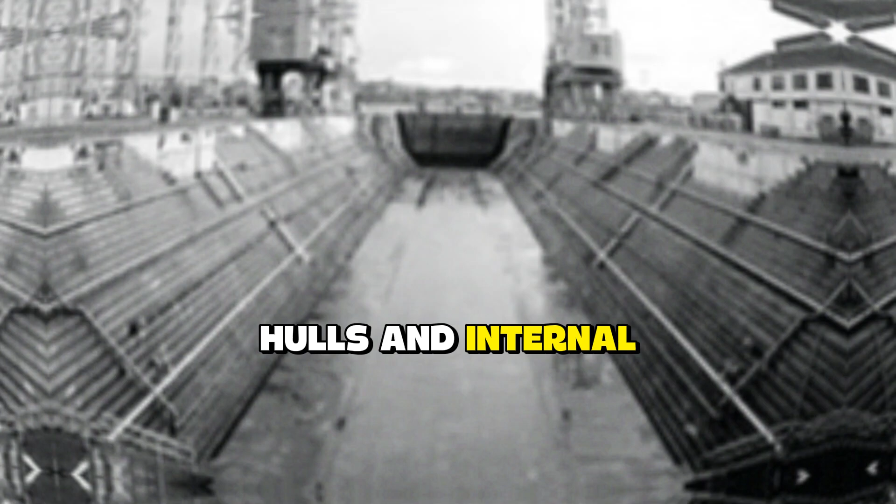He earned $11 per day, working the day shift from 7 in the morning until 4 in the afternoon. His job was welding, primarily on submarine hulls and internal structures. He was good at his work, fast and precise, but increasingly frustrated by what he saw as wasteful inefficiency. The problem was everywhere he looked.

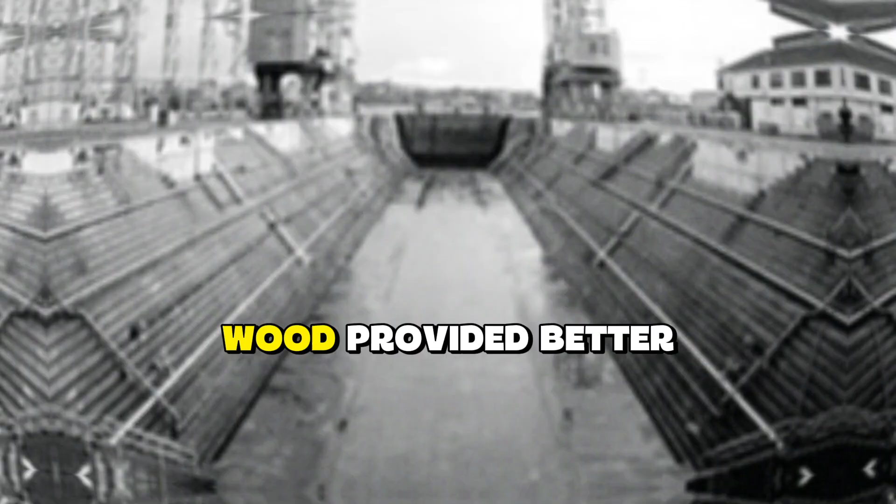Wooden deck planking installation on submarines, destroyers and aircraft carriers. The Navy specified wooden decks for several reasons. Wood provided better traction than steel in wet conditions. Wood was quieter for crew movement. Wood provided some insulation against the cold steel beneath. And in the event of fire, wooden decks could be more easily repaired or replaced than welded steel plates. But the installation method was archaic, labor-intensive, and painfully slow.

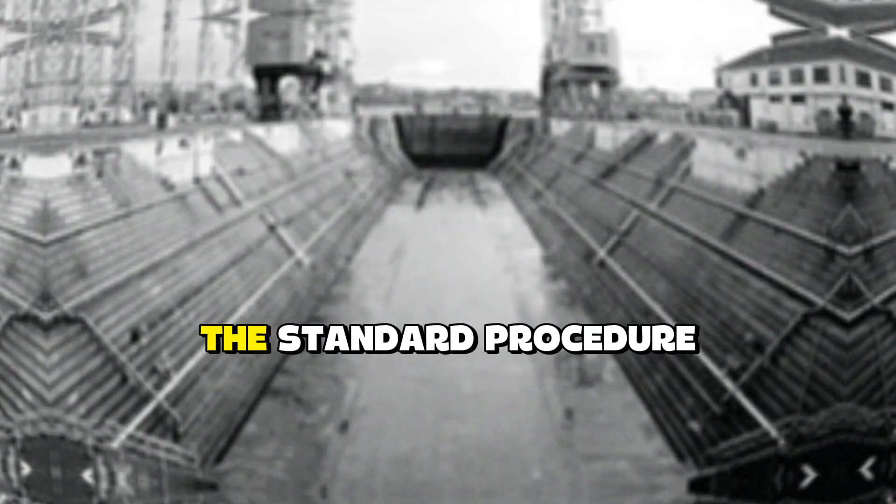The standard procedure, unchanged since the First World War, proceeded in a series of complicated steps. First, workers would drill holes through the wooden planks at precisely measured intervals. These holes would be countersunk to allow the heads of the attachment bolts to sit flush with the deck surface. Next, workers would position the planks on the steel deck framework. Then came the nightmare: workers had to construct extensive scaffolding beneath the deck inside the submarine or ship compartments. Multiple levels of platforms were required to give workers access to the underside of the steel deck framework.

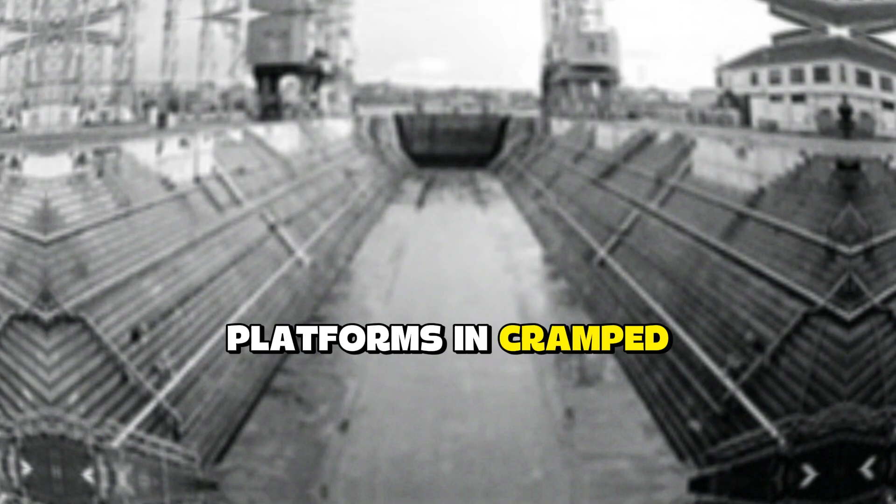Once the scaffolding was in place, workers above and below would coordinate to insert long threaded bolts down through the wooden planks and through corresponding holes in the steel framework. Workers below, standing on scaffolding platforms in cramped dark spaces, would thread nuts onto the protruding bolt ends. They would tighten these nuts with wrenches, pulling the wooden planks firmly against the steel framework above. Finally, workers topside would fill the counterholes with wooden plugs, creating a smooth deck surface. The entire process was repeated for every section of decking. On a submarine, there might be several hundred square feet of wooden decking, requiring thousands of individual attachment points.

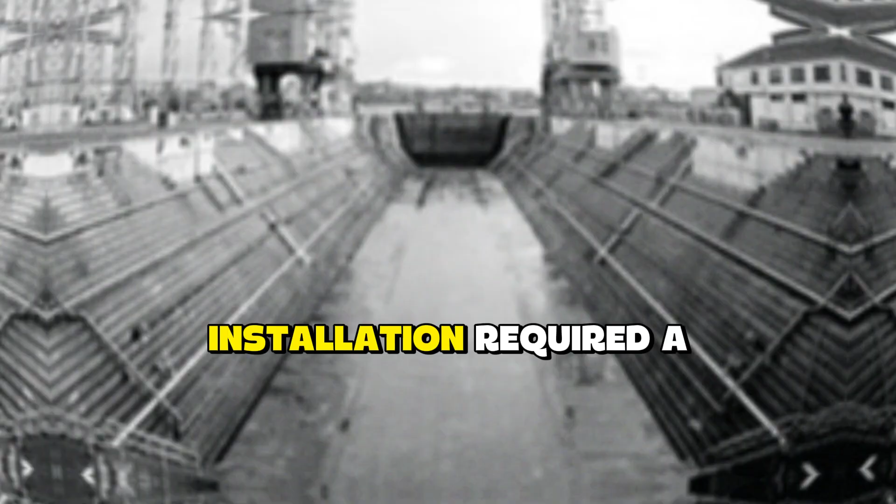On an aircraft carrier, the wooden flight deck covered tens of thousands of square feet. The labor requirements were staggering. A typical submarine deck installation required a crew of 12 to 16 men, working for 5 to 7 days. The scaffolding alone took 2 full days to construct and another day to dismantle.

The actual bolt installation consumed the remaining time. Ted Nelson had performed this work dozens of times. He had spent countless hours standing on scaffolding platforms, threading nuts onto bolts in cramped submarine compartments barely 4 feet high. His back ached from the constant bending. His knuckles were scarred from slipped wrenches. His patience was exhausted, but more than personal discomfort drove his frustration.

He could see the bigger picture. War was coming. Everyone at Mare Island knew it. The yard was already behind schedule on submarine construction. The Navy needed boats in the water, not sitting in dry dock waiting for deck installation. Every day of delay was a day closer to a conflict. America was not ready to fight, and Nelson knew there was a better way.

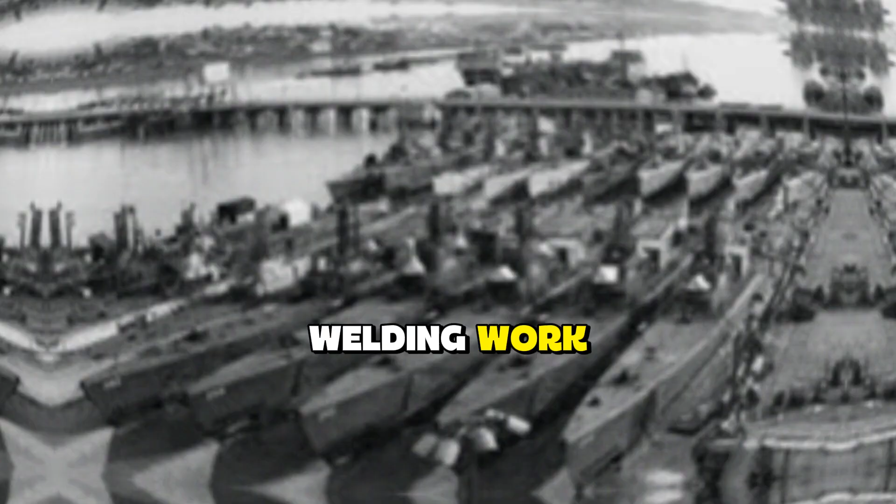He had been thinking about the problem for months, turning it over in his mind during the long hours of routine welding work. The solution seemed obvious to him. Instead of bolting from above and threading nuts from below, why not weld attachment studs directly to the steel framework? Weld from one side only and from above. No scaffolding required, no nuts and bolts, no workers cramped in compartments below. Just fast, strong, permanent welds.

The concept was simple. A threaded stud, essentially a headless bolt, could be welded to the steel deck framework in a fraction of a second. The wooden planks would have threaded inserts or specialized nuts to attach to these studs. The entire operation could be performed from the topside only. No scaffolding, no below-deck work, no coordination between crews above and below.

Nelson had seen stud welding before in a limited form. The technology existed for horizontal flat plate welding. A small pile of flux powder would be placed on a flat steel surface. A stud would be positioned in the flux. An electrical arc would fuse the stud to the steel. But this method only worked on horizontal flat surfaces. The flux powder would simply fall off vertical or overhead surfaces.

And naval construction required welding in all positions, vertical, horizontal, overhead, at all angles. This was the problem that had puzzled welding engineers for 20 years: how to make stud welding work on non-horizontal surfaces. Nelson thought he had the answer. It was so simple he almost laughed when the solution came to him.

Instead of loose flux powder, encase the flux in a small ceramic cap. Attach the cap to the end of the stud. The flux stays in place regardless of position. He sketched his idea in his notebook: a handheld welding gun, a spring-loaded mechanism to press the stud against the steel surface, an electrical trigger to create the welding arc, a disposable ceramic flux cap on the end of each stud. The whole operation would take less than 1 second per stud. One worker could install dozens of studs in the time it currently took to install a single bolted connection.

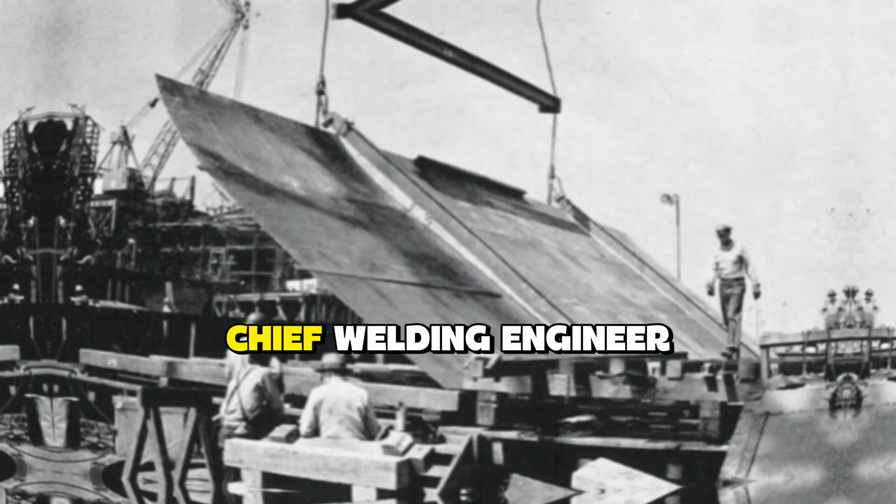Nelson tried again, approaching the shipyard's chief welding engineer, a civilian contractor named Hartwell. He explained the time savings, the labor reduction, the elimination of scaffolding costs. Hartwell was more polite than Morrison, but equally dismissive. "Son, people a lot smarter than you and me have been trying to solve this problem for 2 decades. If it was that easy, someone would have done it already. Besides, the Navy has specifications. We cannot just change procedures because a welder has an idea."

"You need approval from the Bureau of Ships in Washington. You need engineering studies. You need prototype testing. That takes years." "We do not have years," Nelson protested. "We need submarines now." Hartwell shrugged. "That is not my problem, Mr. Nelson. My problem is building boats according to approved specifications. Your problem is doing the welding work you are paid to do."

Nelson left the meeting angry and disillusioned. He had offered them a solution that could save thousands of hours per submarine. They had dismissed him without serious consideration, not because his idea was flawed, not because it would not work, but because he was just a welder.

Because changing procedures required paperwork and approvals. Innovation was less important than following established protocols.

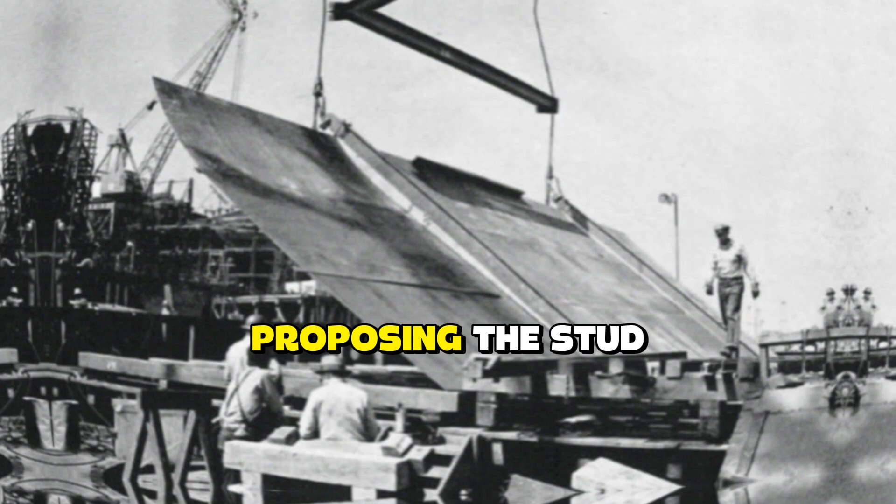He made one more attempt, writing a formal letter to the shipyard commander, Captain Thomas Withers. The letter was carefully composed, explaining the current inefficiency, proposing the stud welding solution, and estimating time and cost savings. He submitted it through proper channels, following the established procedure for worker suggestions.

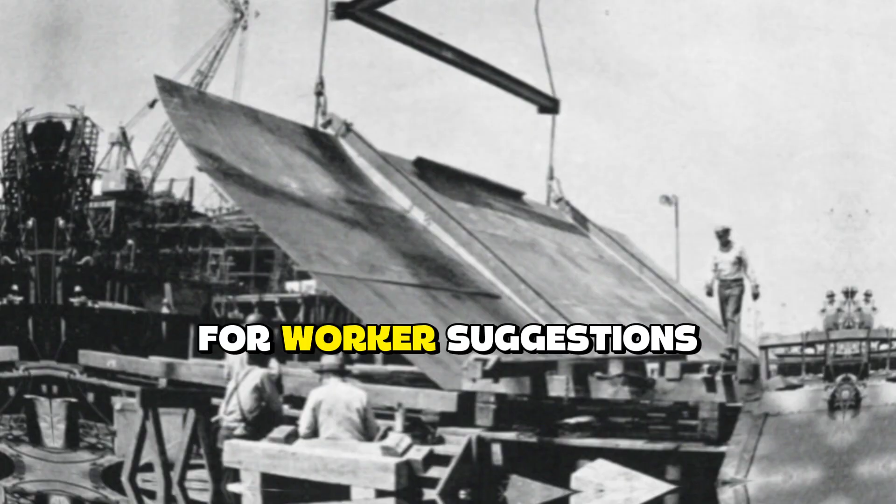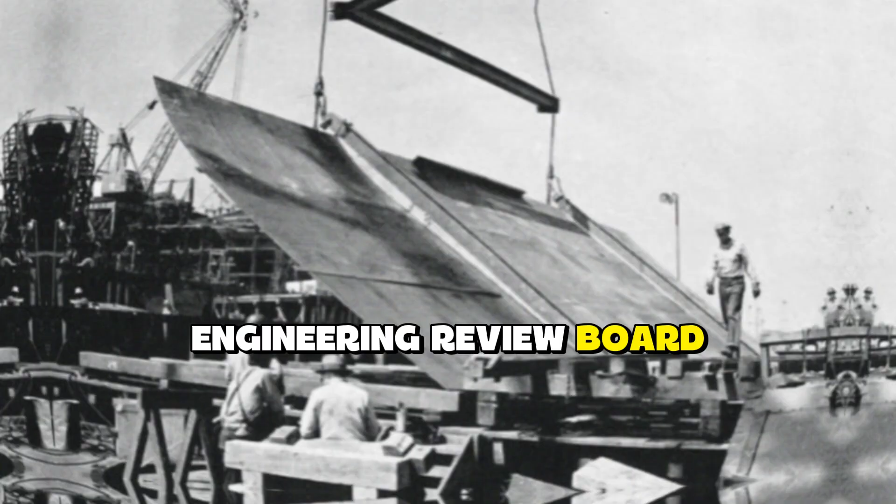Three weeks later, he received a reply: a form letter thanking him for his interest in improving shipyard efficiency, a polite explanation that all technical proposals were evaluated by the Bureau of Ships Engineering Review Board, a notation that his suggestion had been forwarded for consideration, and a realistic assessment that the review process typically took 18 to 24 months. He would be notified if his proposal was approved for further study.

18 to 24 months. By then, the war might already be over or lost. Nelson crumpled the letter and threw it in the waste bin. That evening, he made a decision that would change his life and alter the course of naval history: if the Navy would not listen, he would build it himself.

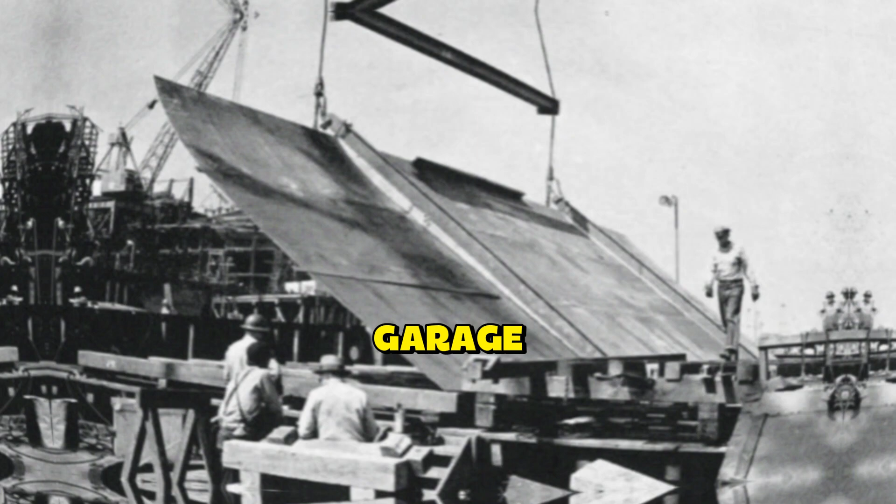He would prove his concept worked. Then they would have to pay attention. He cleared a space in the garage behind his small cottage in Vallejo. His wife, Emma, watched with concern as he began collecting scrap steel and welding equipment. "Ted, you are going to get yourself fired," she warned.

"You are supposed to be working on Navy projects, not your own inventions." "This will help the Navy," he replied. "They just do not know it yet."

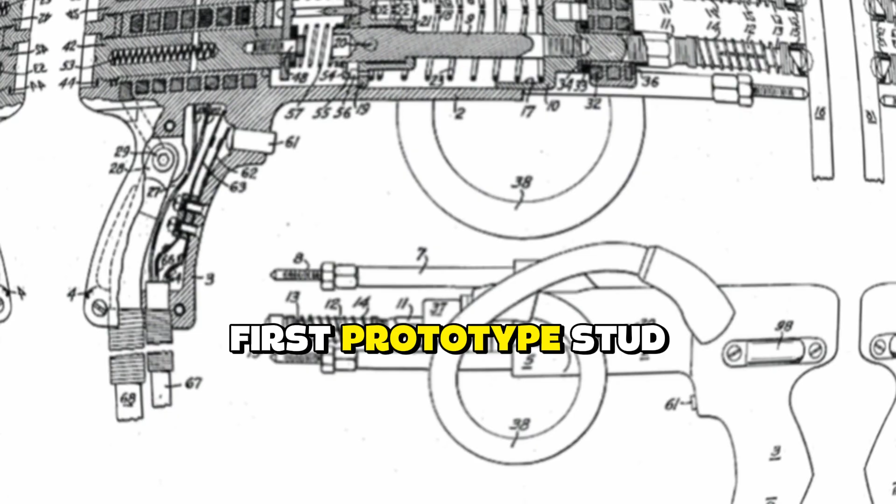Over the following weeks, working evenings and weekends, Nelson constructed his first prototype stud welding gun. The design was crude but functional: a pistol grip handle, a spring-loaded plunger to hold and press the stud, an electrical trigger connected to a welding power supply, and a quick-release mechanism to load new studs.

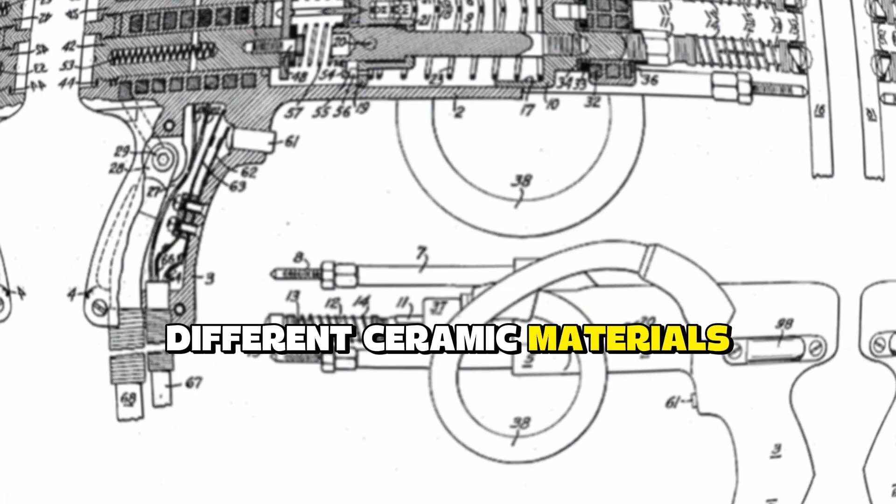The most critical innovation was the flux cap. He experimented with different ceramic materials, different flux compositions, and different cap designs. After dozens of tests, he developed a cap that held the flux securely, allowed proper arc initiation, and could be manufactured cheaply. By May 1941, he had a working prototype.

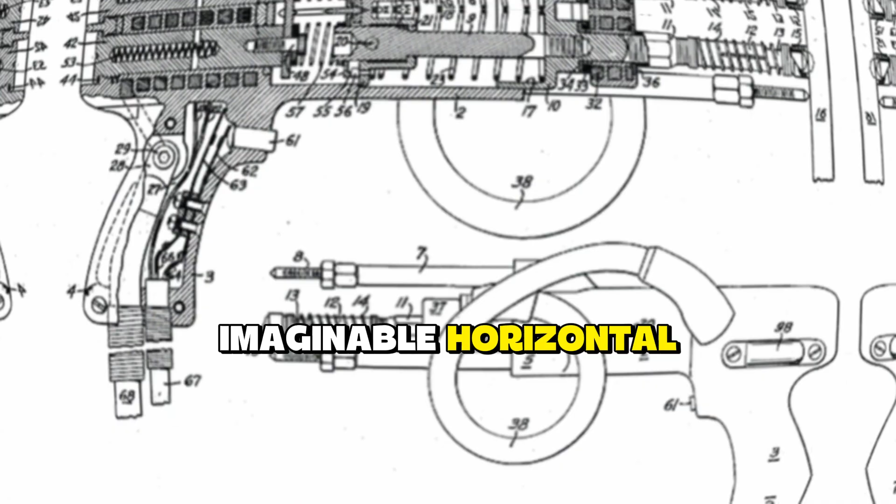He tested it on scrap steel in every position imaginable: horizontal, vertical, overhead, at angles. The gun worked flawlessly. A stud could be welded in less than one second. The weld strength exceeded that of traditional through bolts, and most importantly, it required no below-surface access.

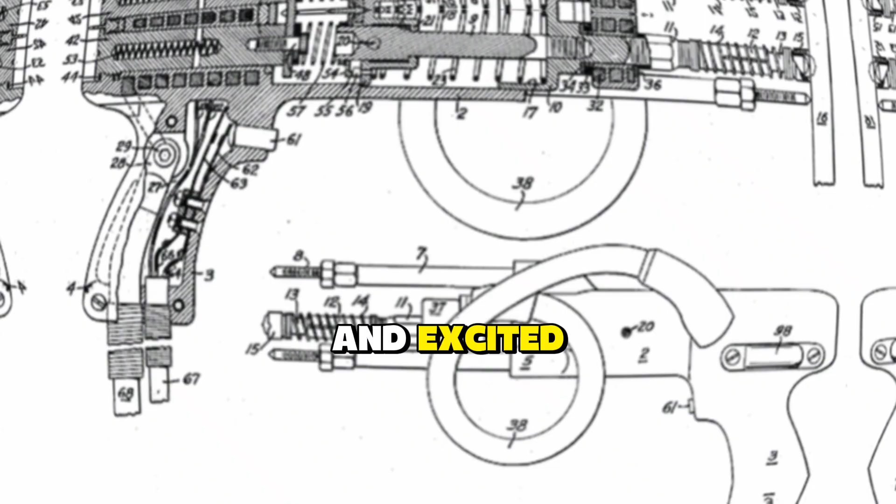He brought the prototype to work, demonstrating it to several fellow welders during lunch break. They were impressed and excited. "This is going to save us so much time," one remarked. "You need to show this to Morrison," another suggested. Nelson shook his head. "I already showed Morrison. He was not interested."

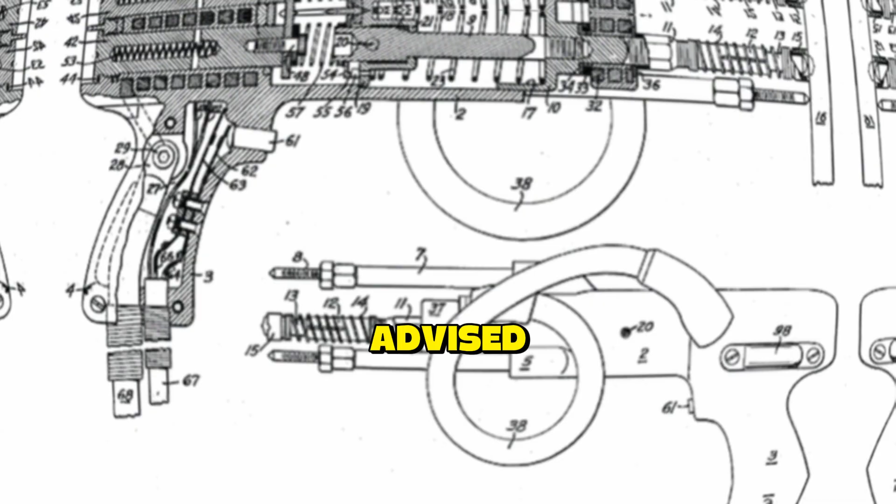"Then quit and start your own company," a third welder advised. "Sell your gun to shipyards across the country. You will make a fortune." The idea had not occurred to Nelson.

He was a welder, not a businessman. He had no capital, no manufacturing facility, no business experience. But the more he thought about it, the more sense it made. If the Navy would not use his invention, maybe private shipyards would.

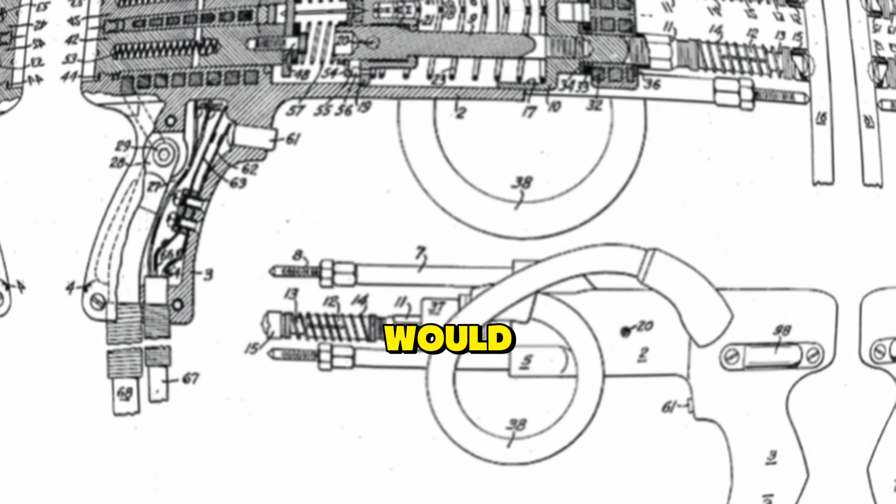The Kaiser shipyards in Richmond were hiring. The Bethlehem Steel Shipyard in San Francisco was expanding. There were shipyards up and down the West Coast, all facing the same labor shortages and production pressures. On June 20th, 1941, Ted Nelson submitted his resignation to Mare Island Naval Shipyard.

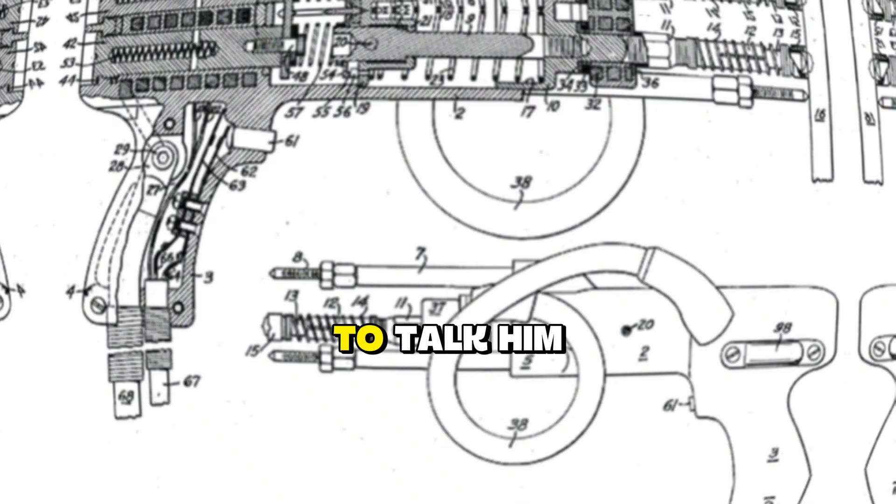His supervisor tried to talk him out of it. "Nelson, you are a good welder. Do not throw away a steady job for some crazy invention." But Nelson's mind was made up.

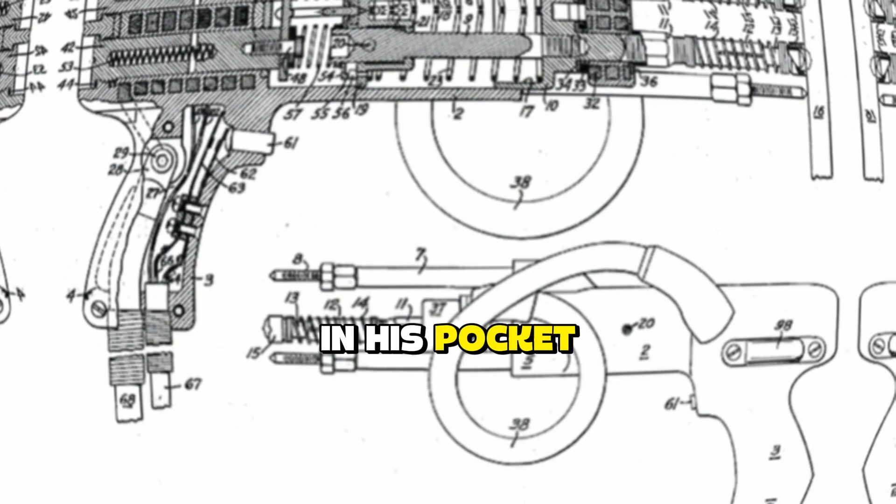"I'm going to build welding guns," he told Morrison. "And when the Navy comes back asking to buy them, I hope you remember this conversation." He left Mare Island with $11 in his pocket, a garage full of tools, and a conviction that his invention would succeed. He incorporated the Nelson Specialty Welding Equipment Corporation on July 1st, 1941.

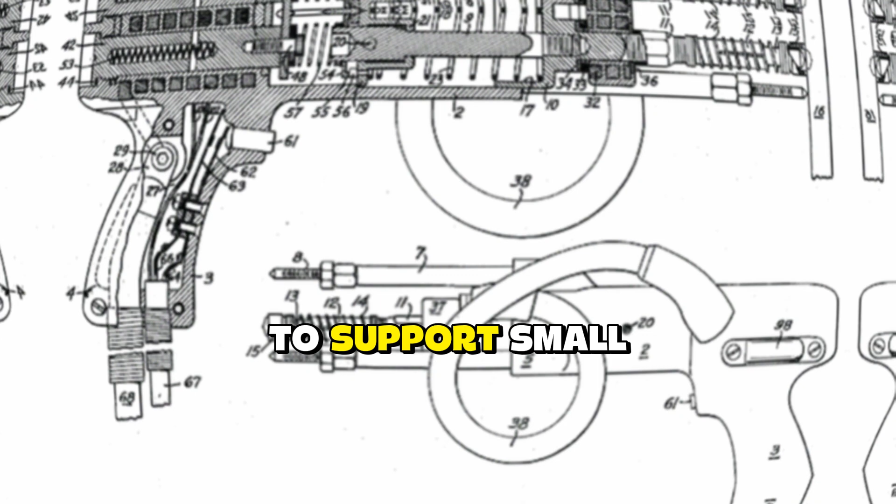He borrowed $95,000 from the Reconstruction Finance Corporation, a government lending agency established during the Depression to support small businesses. With that capital, he rented a small workshop in Vallejo and began manufacturing stud welding guns.

The first months were difficult. He had no customers, no reputation, no distribution network. He made sales calls to local machine shops and small fabrication companies, demonstrating his gun and explaining the time savings. Most were skeptical. A few were interested enough to try a demonstration unit. Slowly, very slowly, orders began to come in.

By September 1941, he had sold 18 welding guns and several thousand flux-capped studs. Then on December 7, 1941, everything changed. Pearl Harbor. The Japanese attack destroyed or damaged 8 battleships, 3 cruisers, 3 destroyers, and 188 aircraft. 2,403 Americans died. The United States was at war.

Suddenly, shipbuilding was not just important. It was a matter of national survival. Within days of Pearl Harbor, the shipbuilding industry exploded into frantic activity. The Kaiser shipyards began building Liberty ships at an unprecedented pace. Mare Island Naval Shipyard received emergency orders for submarine construction. Bethlehem Steel and other private yards started working triple shifts, and every single one of these facilities faced the same problem: how to build ships fast enough. The traditional methods were too slow, too labor-intensive, too wasteful of precious time.

Ted Nelson's phone began ringing. Shipyard purchasing agents who had dismissed his invention weeks earlier now wanted to place large orders. The Kaiser shipyards ordered 50 welding guns and 10,000 studs. Bethlehem Steel ordered 40 guns. Even Mare Island Naval Shipyard, where he had been rebuffed just months earlier, placed an order for 60 guns and 20,000 studs. Morrison, his former supervisor, handled the purchase requisition. There was no apology, no acknowledgement that Nelson had been right, just an official order and a request for prompt delivery.

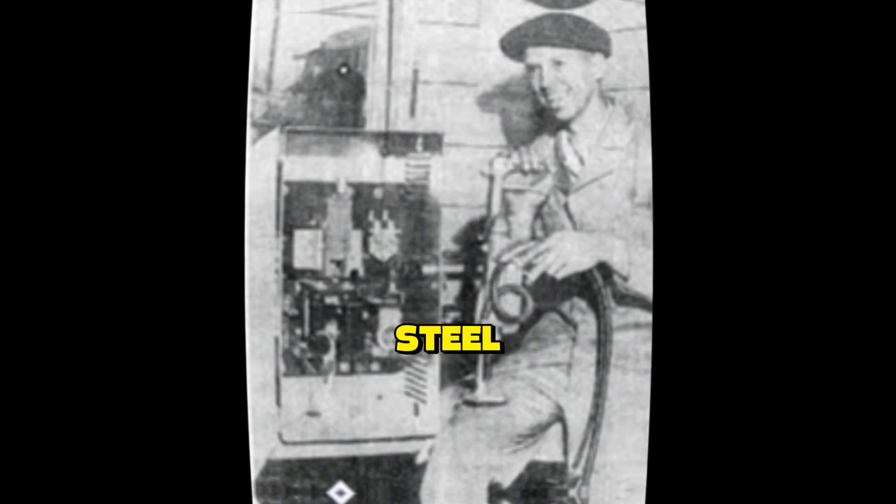At Mare Island Naval Shipyard, submarine construction accelerated dramatically. The yard completed 17 submarines between 1941 and 1945, with an average construction time that steadily decreased as new techniques were implemented. Stud welding was not the only innovation, but it was a critical piece of the efficiency puzzle. By mid-1942, stud welding was being used not just for deck attachment, but for dozens of other applications: pipe hangers, cable supports, equipment mounts, bulkhead attachments. Any situation where a fastener needed to be attached to a steel structure, stud welding provided a faster solution.

The Navy Bureau of Ships, which had initially ignored Nelson's proposal, now studied his process intensively. Engineering teams analyzed weld strength, durability, and failure modes. The results confirmed what Nelson had known all along. His welds were not just faster than traditional methods. They were actually superior in strength and reliability.

On November 19, 1942, just 17 months after leaving his job, Ted Nelson received a formal visit from a delegation of Navy officers. They came to his San Leandro plant unannounced, a group of 5 men in dress uniforms. Captain Harrison, representing the Bureau of Ships, did the talking.

"Mr. Nelson, we are here to inform you that the Navy has completed evaluation of your stud welding process. We have determined that your invention has saved the United States Navy an estimated 5 million man-hours in submarine and surface ship construction over the past 10 months. That number is expected to increase substantially as more shipyards adopt your technology." He paused, then continued. "On behalf of the Secretary of the Navy and the United States government, I am authorized to present you with a citation for exceptional contribution to the war effort."

Nelson was stunned. They had rejected his idea. They had ignored his proposals. They had forced him to quit his job and risk everything to prove his concept, and now they were giving him a citation. Captain Harrison must have seen the conflict on Nelson's face.

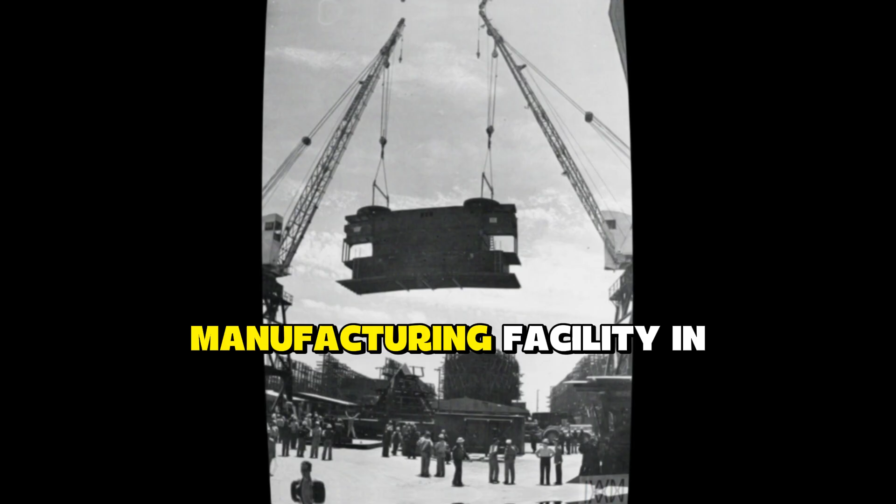The war continued. Production demands increased. Nelson's company expanded again, opening a second manufacturing facility in Camden, New Jersey. In March 1943, this East Coast plant supplied shipyards in New York, Philadelphia, Norfolk, and Charleston. By mid-1943, Nelson Specialty Welding Equipment Corporation employed over 400 workers and generated annual revenue of approximately $4 million.

Ted Nelson still spent 16 hours a day in the factory, still dressed in shop workers' tan pants and shirts, and still drew a modest salary of $1,000 per month. All profits were reinvested in expansion, equipment, and loan repayment. But his impact on the war effort was incalculable.

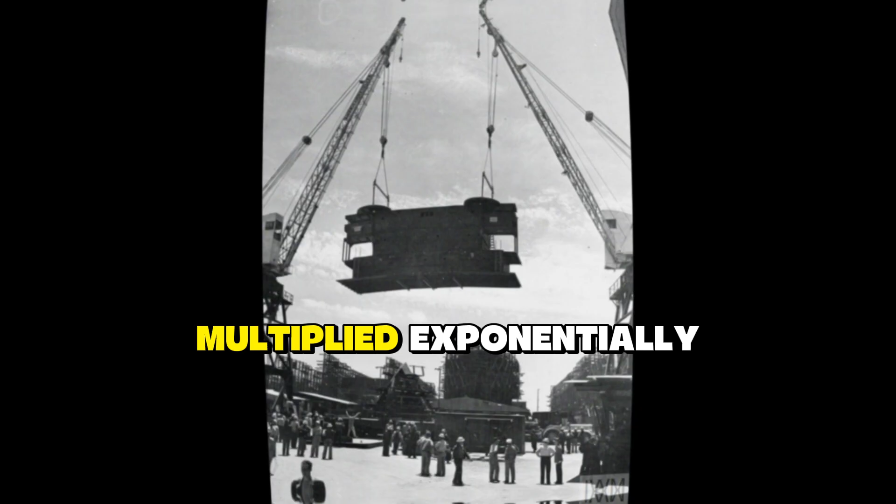The Navy's estimate of 5 million man-hours saved by late 1942 was just the beginning. As the war progressed and stud welding became standard practice across all naval construction, the time savings multiplied exponentially. By 1943, stud welding was being used not just on submarines but on aircraft carriers, battleships, cruisers, destroyers, and hundreds of smaller vessels. The Essex-class aircraft carriers built by Newport News Shipbuilding and other yards used Nelson stud welding extensively for flight deck attachment and interior fittings.

Each carrier required approximately 20,000 studs. The Navy built 24 Essex-class carriers during the war. The Iowa-class battleships used stud welding for deck planking, equipment mounts, and armor attachment. The Baltimore-class heavy cruisers incorporated the technology throughout. Destroyer escorts, landing ships, patrol boats, every type of naval vessel benefited from faster, stronger attachment methods.

But the most dramatic impact was in submarine construction. Mare Island Naval Shipyard, where Nelson had worked and where his idea had been rejected, became one of the most efficient submarine builders in the world. The yard built 17 submarines during the war with steadily improving construction times. Portsmouth Naval Shipyard in New Hampshire became the champion submarine builder, completing 79 submarines between July 1940 and July 1945.

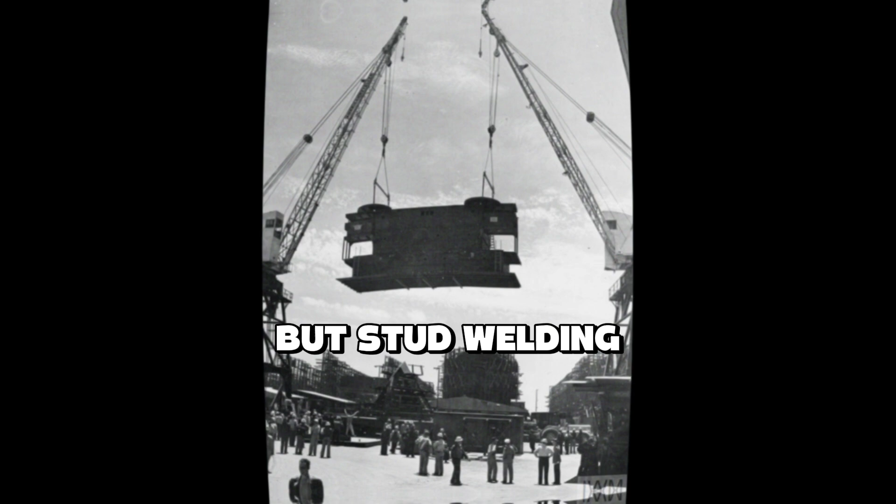Portsmouth's success was built on multiple innovations, but stud welding was a critical enabling technology. The yard adopted Nelson's system extensively, using it not just for decking but throughout the boat's interior. The result was visible in construction statistics.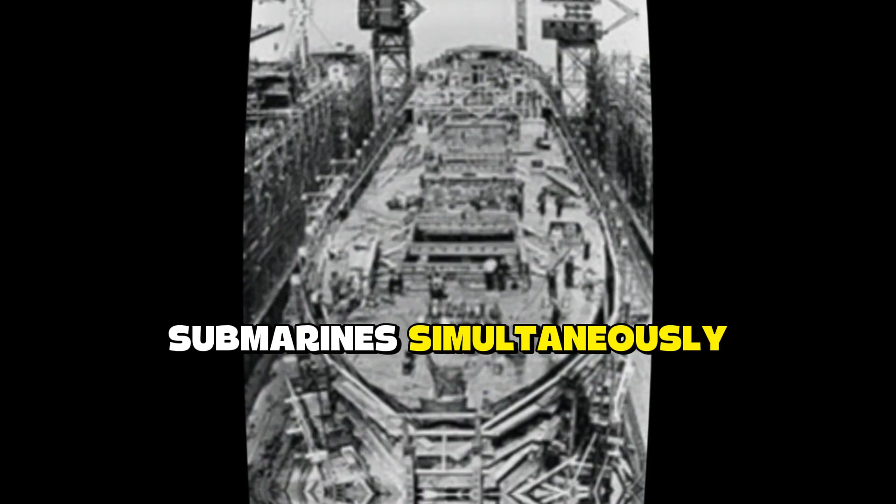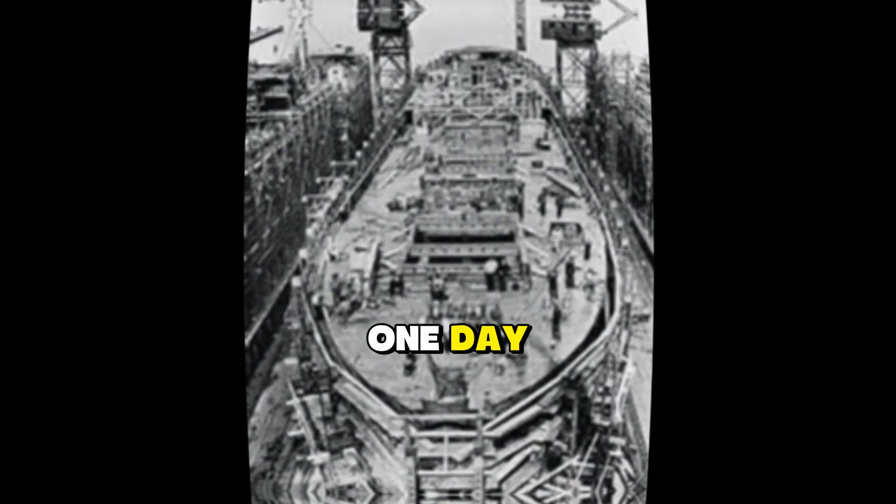Portsmouth launched 3 submarines simultaneously on January 27, 1944, the Redfish, Ronquil, and Razorback. A 4th submarine, Scabbardfish, launched the same day, 4 submarines in one day. No shipyard before or since has matched that achievement. At the peak of production, Portsmouth completed 32 submarines in 1944. This was approximately 1 submarine every 11 days.

The Balao-class submarines, which made up the bulk of wartime production, averaged 12 months from keel laying to commissioning at Portsmouth, several months faster than other yards building the same class. Electric Boat Company in Groton, Connecticut, built 74 submarines during the war. Manitowoc Shipbuilding in Wisconsin, despite being on the Great Lakes hundreds of miles from the ocean, built 28 submarines that were floated down the Mississippi River to the Gulf of Mexico. Across all yards, the United States built 203 submarines during World War II.

Each submarine required thousands of stud-welded attachments. Each stud saved minutes of labor time. Multiply those minutes by thousands of studs per submarine, by hundreds of submarines, and the time savings reached staggering proportions. But submarines were only part of the story. The real volume was in surface ships and merchant vessels.

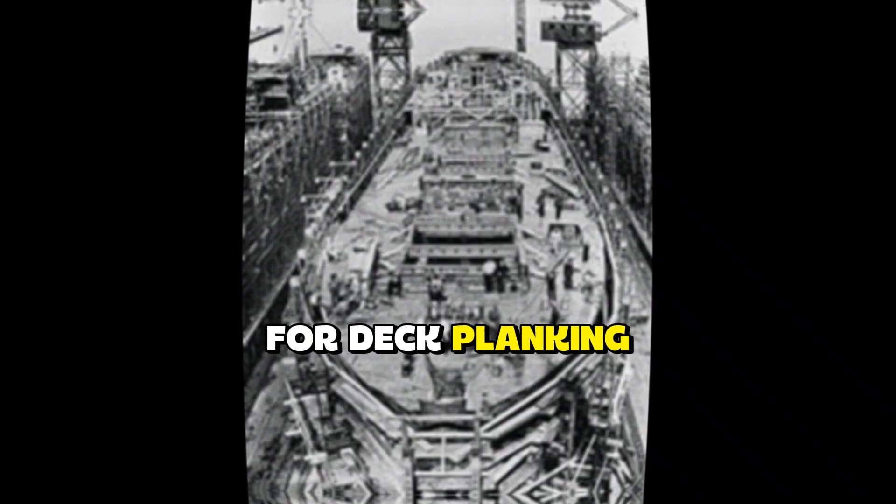The Liberty Ship program, managed by the Maritime Commission and built primarily at Kaiser shipyards, produced 2,710 cargo ships during the war. Each Liberty ship required approximately 5,000 to 8,000 stud-welded attachments for deck planking, cargo handling equipment, defensive gun mounts, and ship fittings. The Victory ships, a faster and more advanced design, were built to similar standards.

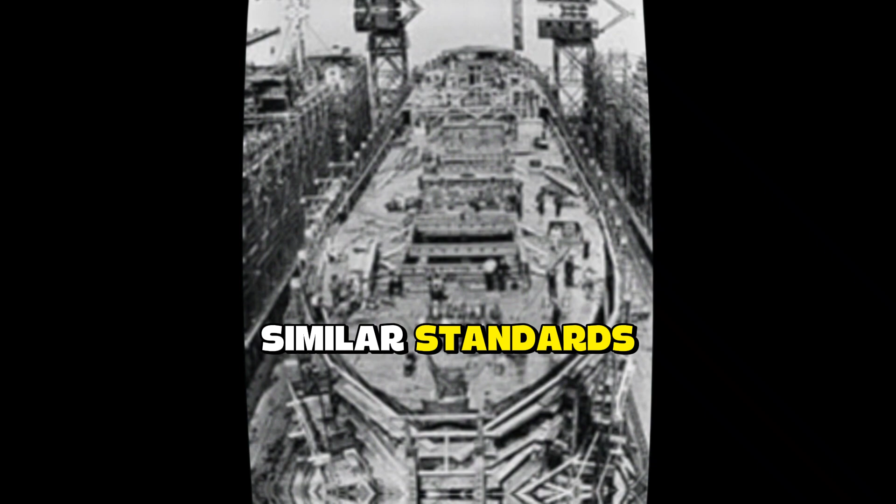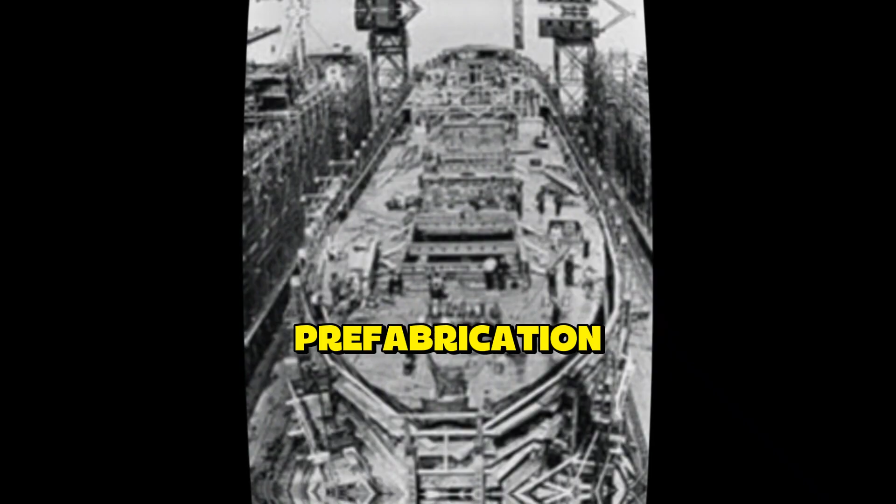The scale of production was unprecedented in human history. At the peak of Liberty ship construction in 1943, American shipyards launched 3 new ships every day, 75 ships per month, 900 ships per year. This was possible only through radical innovations in construction methods, prefabrication, modular assembly, specialized workers, dedicated tools, and faster attachment methods. Stud welding was one piece of a larger revolution in shipbuilding efficiency, but it was a critical piece. The elimination of scaffolding freed workers for other tasks.

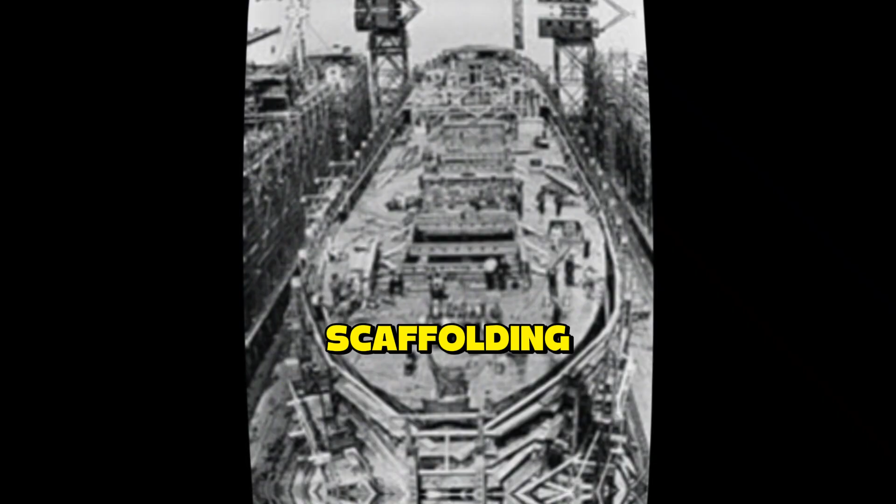The speed of installation reduced assembly time. The strength and reliability of the welds ensured that these hastily built ships could survive North Atlantic storms and enemy attacks.

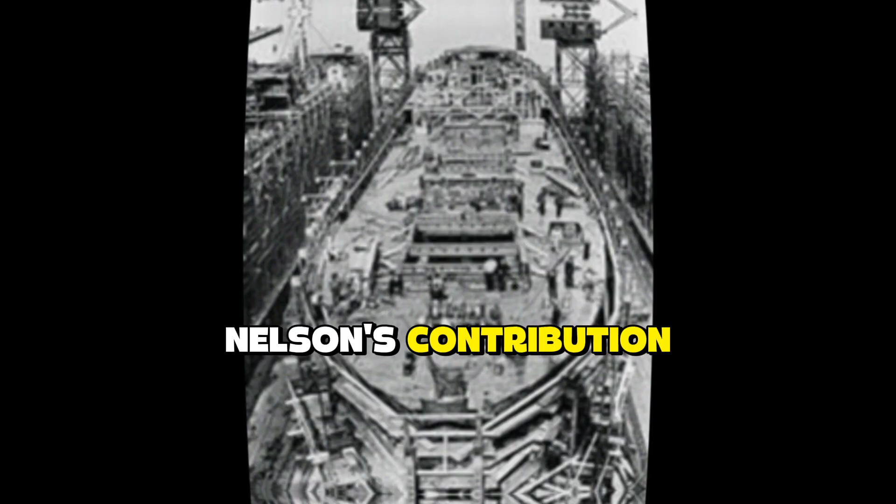By the spring of 1943, the United States Navy had taken formal notice of Nelson's contribution. On May 11, 1943, the Secretary of the Navy presented the Nelson Specialty Welding Equipment Corporation with the Army-Navy E Award for Excellence in Production.

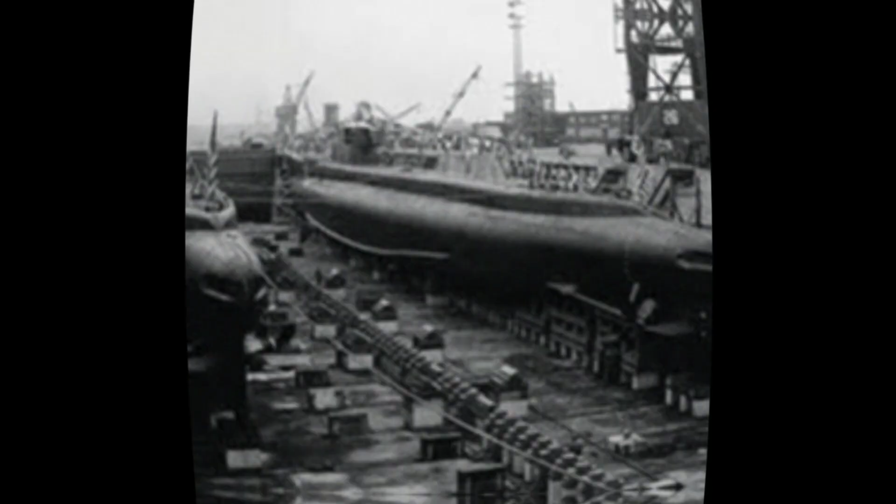The E Award was created in July 1942 to recognize companies whose production facilities achieved outstanding performance in manufacturing war equipment. Excellence in quality and quantity were the determining factors. Only about 5% of companies engaged in war work received this honor.

The award consisted of a pennant for the factory and individual pins for all employees. The ceremony was held at the San Leandro plant with full military honors. Navy officers, Army representatives, and local officials attended.

The factory workers, Nelson's employees, who had worked grueling hours to meet production demands, received their pins with pride. Ted Nelson, standing before his workers in his usual shop clothes, accepted the pennant and gave a brief speech.

"We did not do this for awards or recognition. We did this because our country needed it. Every stud we make, every gun we build helps bring our sailors and soldiers home safely. That is all the reward we need."

But the Navy was not finished recognizing Nelson's achievement. Plants that maintained outstanding performance for 6 months after receiving the initial E Award were granted a star to add to their pennant. The Nelson Company earned its first star in November 1943.

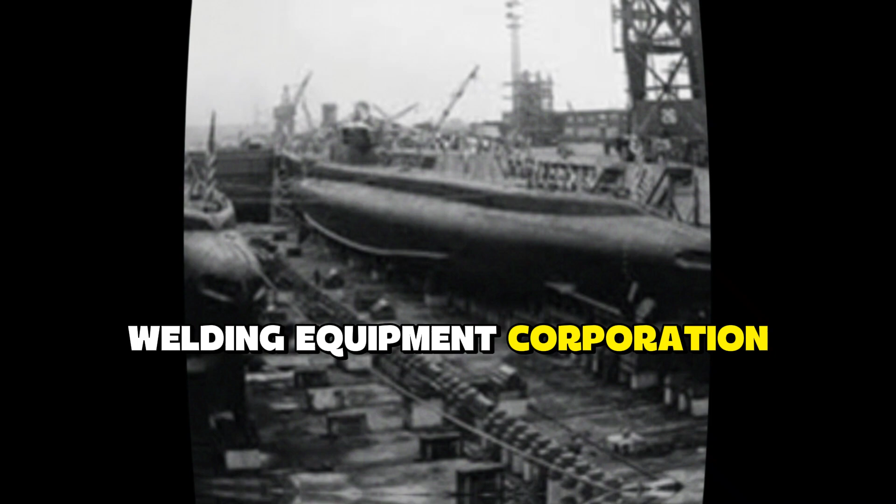The second star came in May 1944. By the end of the war, the Nelson Specialty Welding Equipment Corporation had earned 2 E awards with stars, one of only a handful of companies to achieve this distinction.

This time savings came from one simple innovation, a spring-loaded welding gun and a ceramic flux cap. The time savings translated directly into ships in the water faster.

More submarines hunting Japanese convoys, more destroyers escorting convoys, more aircraft carriers launching strikes, more landing ships delivering Marines to hostile beaches. Every ship delivered faster meant more combat power. More supplies delivered, more lives saved. The strategic impact was incalculable.

But Nelson's invention had another unexpected benefit. The stud welding process required less skill than traditional bolt installation or conventional welding. With minimal training, new workers could perform stud welding operations safely and effectively. This was crucial as the war progressed and labor shortages intensified.

Women entered the shipyards in unprecedented numbers. The famous Rosie the Riveter symbolized female shipyard workers, but there were also Wendy the Welders. Women operated stud welding guns, installed deck planking, and mounted equipment. Many became highly skilled at the process.

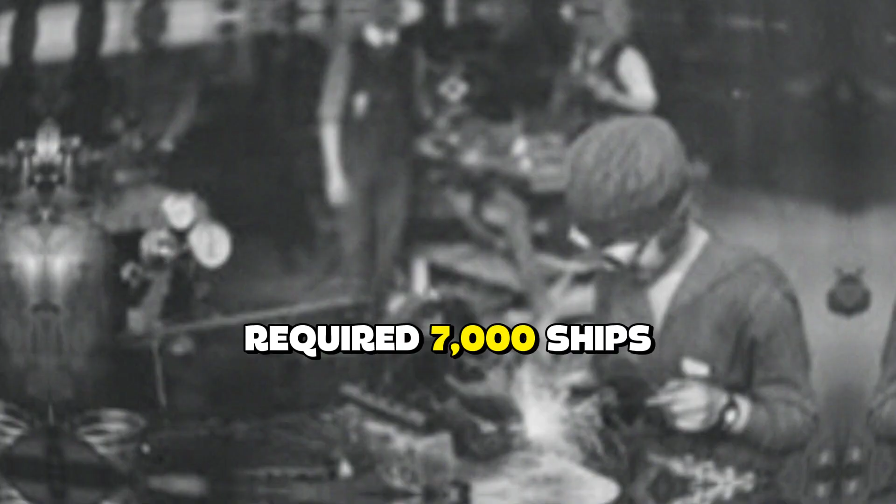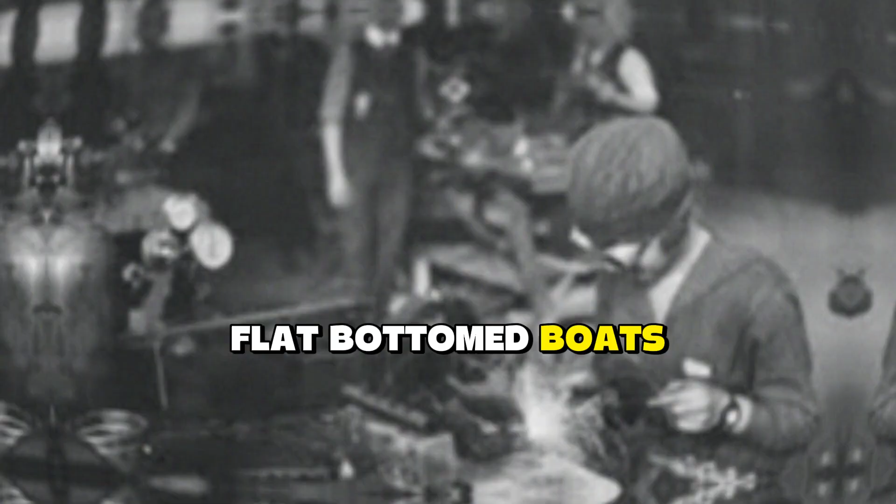The D-Day invasion of Normandy on June 6, 1944, required 7,000 ships and landing craft. This armada, the largest amphibious assault in history, was possible only because American and British shipyards built landing craft by the thousands. The landing ships were crude vessels, flat-bottomed boats designed to run up on beaches and discharge cargo. But they required rapid construction and reliable fittings.

Stud welding proved ideal for landing craft construction. Cargo ramps, davit mounts, deck fittings all could be installed quickly and securely. Nelson's technology, invented for submarine deck attachment, found applications throughout the landing craft fleet.

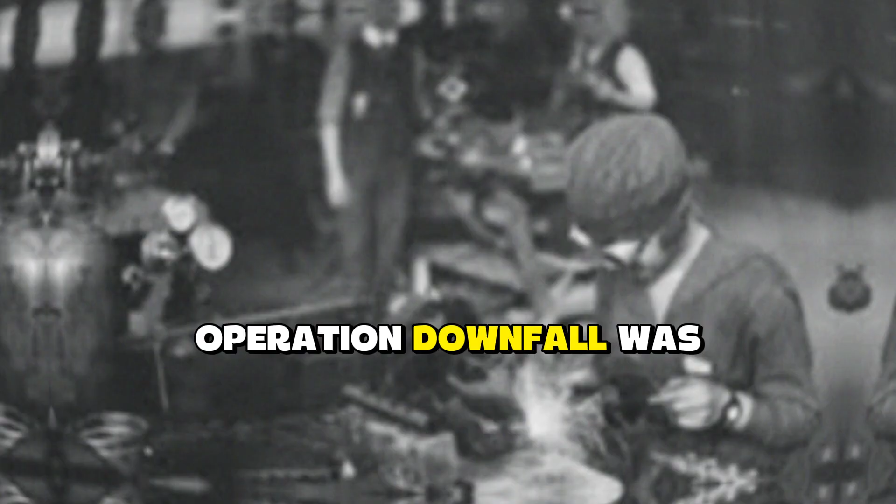After VE Day in May 1945, attention shifted fully to the Pacific. The planned invasion of Japan, Operation Downfall, was scheduled for November 1945. The operation would require more ships, more landing craft, more logistics support than any previous campaign. Shipyards prepared for another surge in production.

Then on August 6 and 9, 1945, atomic bombs destroyed Hiroshima and Nagasaki. Japan surrendered. On August 15, 1945, World War II ended. The massive military production machine began winding down. Contracts were canceled. Workers were laid off. Shipyards closed or converted to peacetime production.

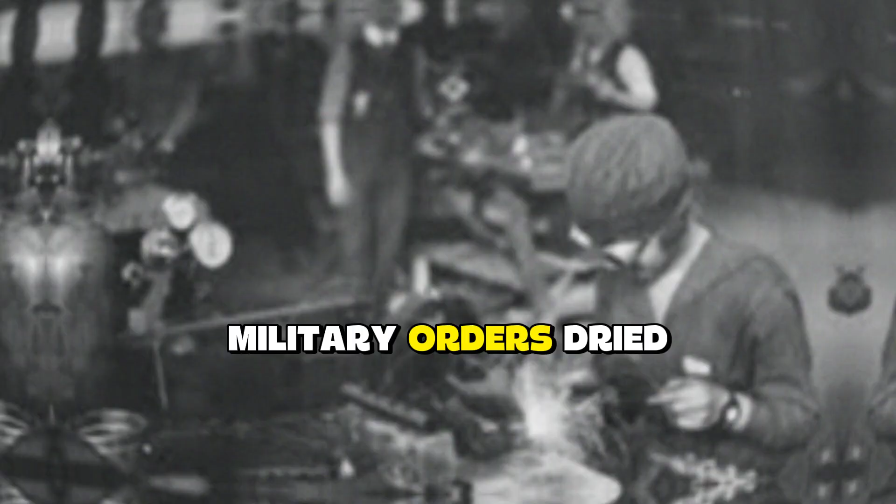The Nelson Specialty Welding Equipment Corporation faced an uncertain future. Military orders dried up almost overnight. The company, which had employed over 400 workers at its peak, now faced potential collapse.

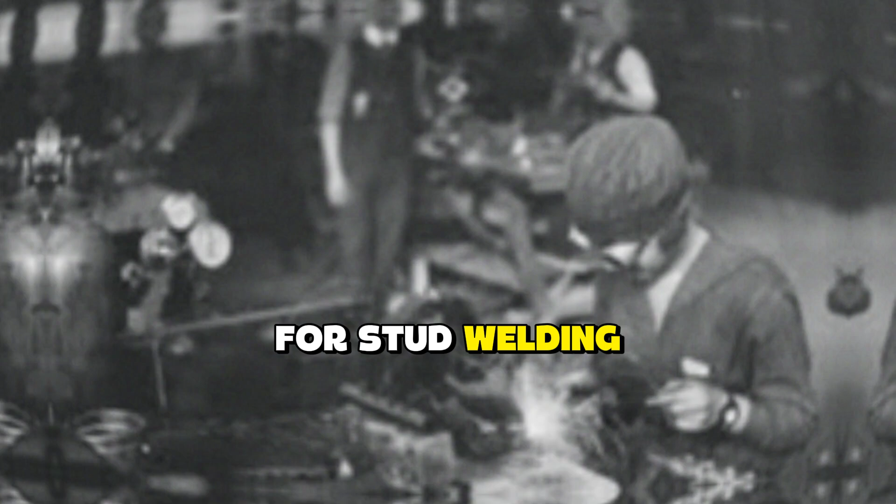But Ted Nelson had prepared for this moment. During the war years, he had been thinking about peacetime applications for stud welding. The technology was not limited to shipbuilding. Any industry that fabricated steel structures could benefit from faster attachment methods: construction, bridges, buildings, tanks, pressure vessels, automotive.

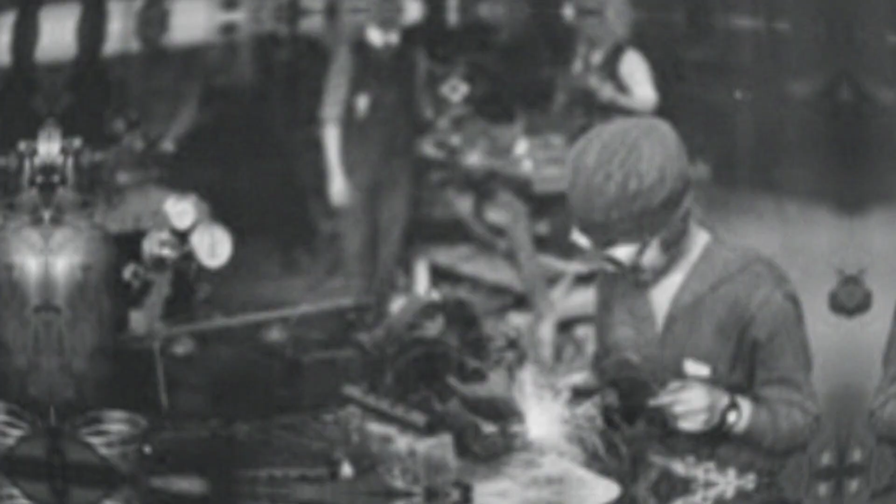The possibilities were extensive. Nelson pivoted to civilian markets. He marketed his stud welding systems to construction companies, steel fabricators, and industrial manufacturers. The post-war construction boom provided new opportunities. America was building highways, bridges, skyscrapers, and suburbs. All required steel fabrication and attachment.

By 1948, Nelson's company had successfully transitioned to peacetime production. The business was smaller than during wartime, but stable and growing. The company continued to innovate, developing new stud designs, improved welding guns, and specialized applications.

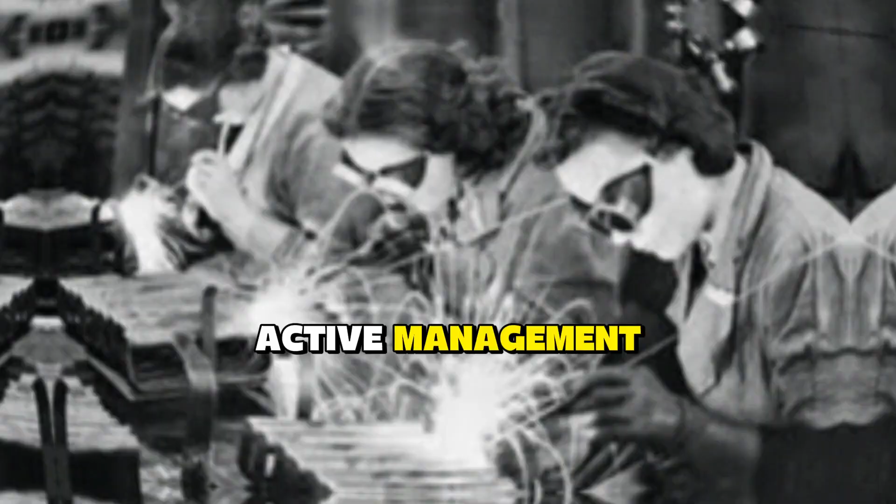In 1950, Nelson sold his company to TRW, a large industrial conglomerate. The sale made Nelson financially secure and allowed him to retire from active management. But the Nelson name remained on the product. TRW continued to market Nelson's stud welding equipment, maintaining the brand recognition Nelson had built.

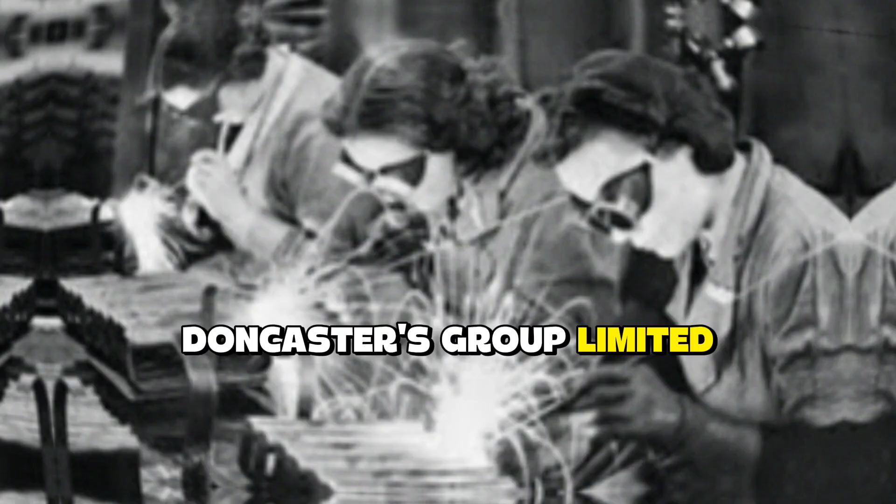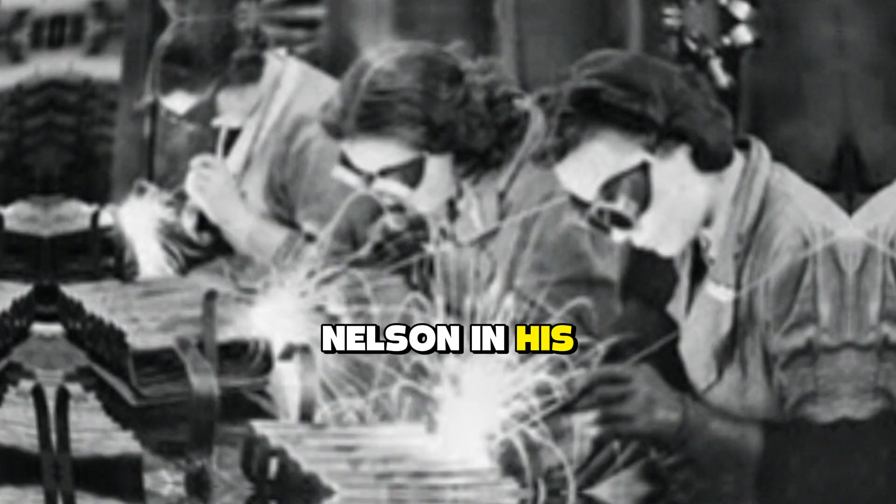Over subsequent decades, the company changed hands several times. TRW sold to Farsantech Incorporated in 2000. Doncaster's Group Limited acquired Farsantech in 2007. Stanley Black & Decker purchased the industrial division in 2018. Through all these changes, the Nelson brand survived. Today, Stanley Engineered Fastening manufactures and markets Nelson stud welding products globally. The technology pioneered by Ted Nelson in his garage in Vallejo remains in use worldwide.

Modern stud welding is more sophisticated than Nelson's original design. Inverter power supplies provide precise arc control. Automated systems handle high-volume production. Robotic welders apply studs in automotive assembly plants, but the fundamental principle remains the same: a stud, a flux cap, a spring-loaded gun, and an electrical arc. One second per stud. No scaffolding required.

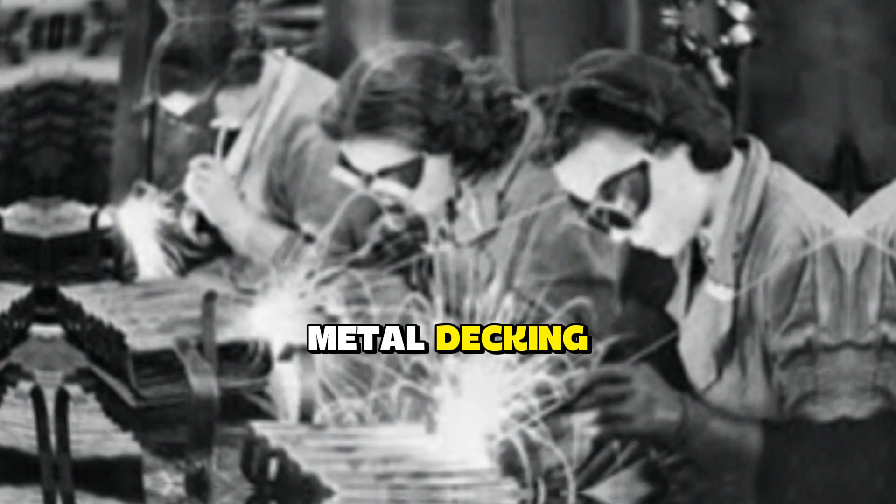The applications have expanded far beyond shipbuilding. Construction workers use stud welding to attach metal decking to steel beams in skyscrapers. Bridge builders use it for guardrail posts and lighting mounts. Nuclear power plants use it for cable trays and equipment supports. Automotive manufacturers use it throughout vehicle bodies for grounding points and trim attachment. The technology Nelson invented to solve a naval construction problem has found applications in virtually every industry that works with steel.

But the most touching legacy of Nelson's invention is found in the restoration of historic ships. The battleship Texas, one of only 7 remaining ships to have served in both World Wars, is currently undergoing restoration at a dry dock facility. The ship requires extensive work to repair corroded hull plates and deteriorated fittings.

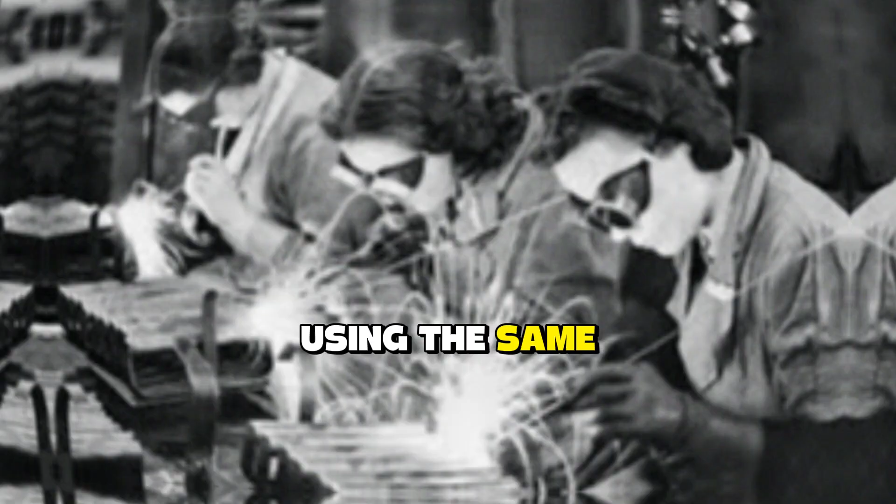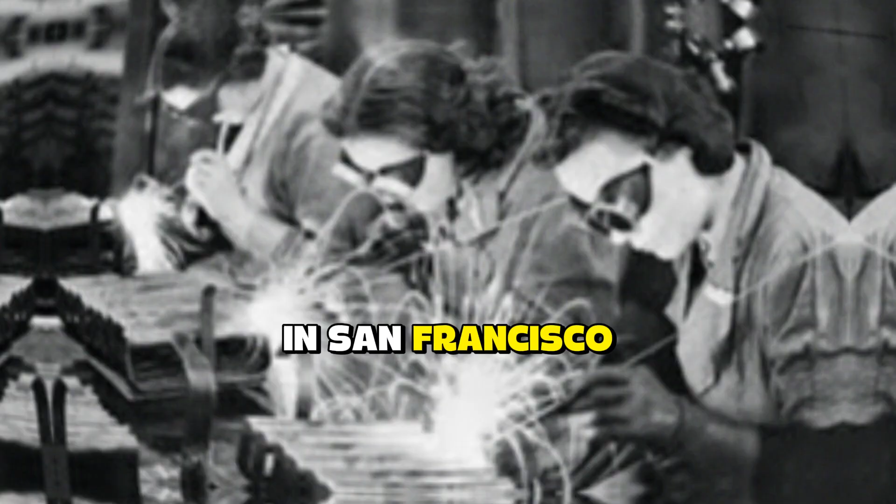The restoration team discovered that modern Nelson stud welding equipment is ideal for this work. They can attach new steel plates using the same technology Ted Nelson invented 80 years ago. Similarly, the submarine USS Pampanito, a World War II boat now preserved in San Francisco, uses Nelson stud welding for ongoing maintenance. The boat sits at the Embarcadero, hosting over 100,000 visitors annually. Keeping the old boat safe and functional requires constant attention. Nelson equipment allows the volunteer restoration crew to perform welding work efficiently without requiring certified welders.

The statistics of his achievement tell only part of the story. 50 million man-hours saved, 2 Army Navy E awards, thousands of ships built faster, billions of studs manufactured, but numbers cannot capture the full impact. Behind those statistics were sailors who returned home because their submarine was completed in time to join the fleet. Marines who survived because landing craft were available for their assault. Families who were not torn apart because the war ended sooner. The true measure of innovation is not just efficiency gained, but lives preserved.

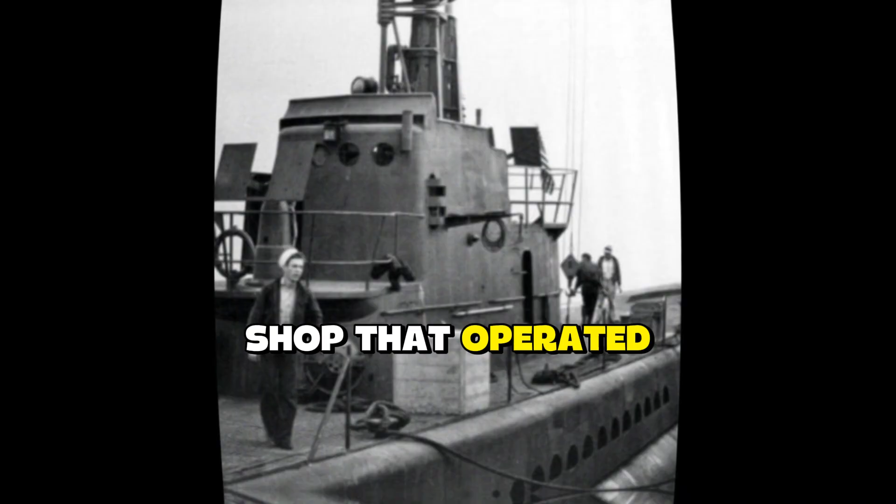Some of the historic buildings remain, including the chapel, dry docks, and industrial structures. Walking through these preserved spaces, visitors can imagine the frantic activity of the war years, when tens of thousands of workers built submarines around the clock. In Building 46, the old pipe shop that operated until 1984, there is now a small museum. Among the exhibits are tools, photographs, and artifacts from the shipyard's history.

There is no specific exhibit about Ted Nelson. No monument to the welder who saved 50 million man-hours. His story is largely forgotten, except among welding professionals and maritime historians. This anonymity would probably not have bothered Nelson. He was not seeking fame or recognition. He was solving a problem. He was making things work better. He was doing his part to help his country win a war. The fact that his solution worked, that it saved time and lives, that it changed an industry, those were reward enough.

But there is a lesson here for every generation. Innovation often comes from unexpected places. Not from credentialed experts, but from working people who see problems every day and know how to fix them. Not from corporate research labs, but from garage workshops where tinkerers experiment until they find solutions. Not from official channels, but from individuals willing to risk everything on an idea they know is right. The next great innovation might come from a welder in a shipyard, a mechanic in a garage, a nurse in a hospital, a teacher in a classroom.

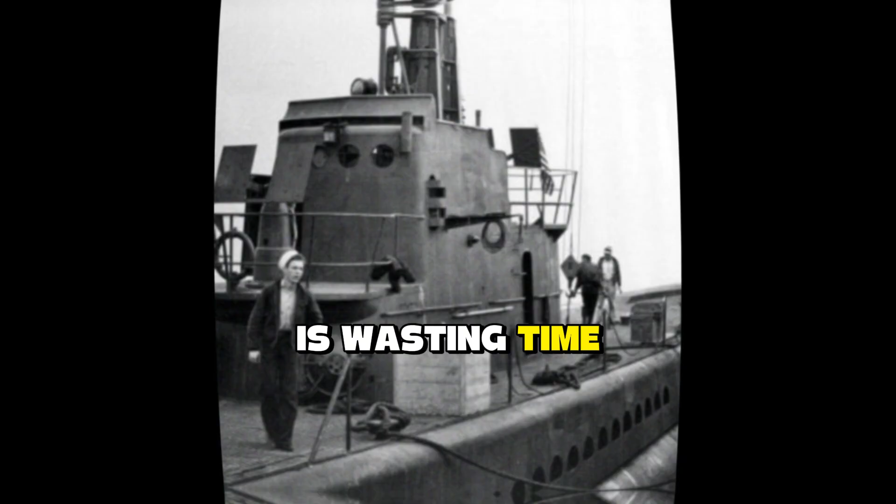It might come from someone official channels dismiss as unqualified, someone bureaucrats tell to follow procedures, someone experts assure is wasting time on an impossible problem. History suggests we should listen to these people, not because all their ideas will work, but because the occasional idea that does work can change everything.

Ted Nelson's ceramic flux cap was just a small piece of ceramic. His welding gun was just a simple spring-loaded tool, but combined they eliminated scaffolding, saved time, increased safety, improved quality, and accelerated ship production at a critical moment in history.

It does not measure the lives saved because submarines reach the Pacific sooner. It does not calculate the morale boost from seeing production goals exceeded. It does not quantify the deterrent effect of American naval power growing faster than enemies anticipated.

The full impact of Ted Nelson's invention may never be fully calculated, but we can say with certainty that America's victory in World War II depended on industrial capacity as much as military valor. The battles were won by soldiers, sailors, and Marines.

But the war was won by workers, engineers, and innovators. People like Ted Nelson who saw a problem and fixed it, who refused to accept inefficiency when efficiency was possible, who understood that in total war every minute saved in production translated to lives saved in combat.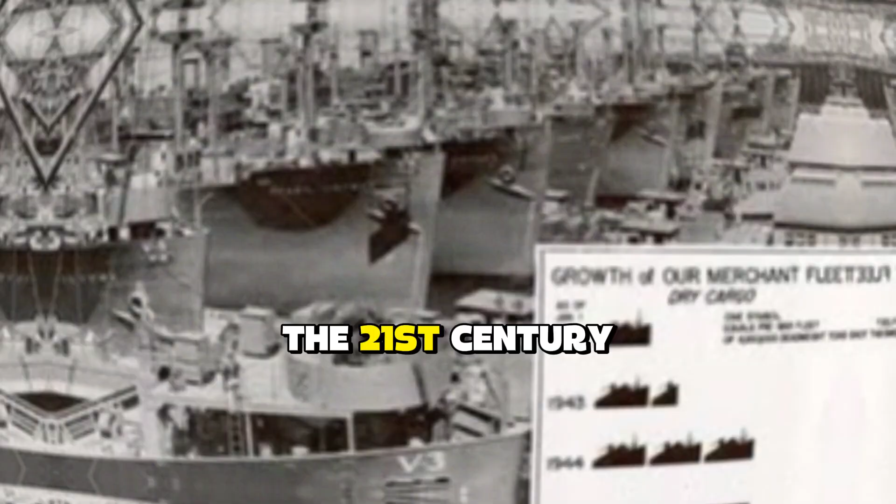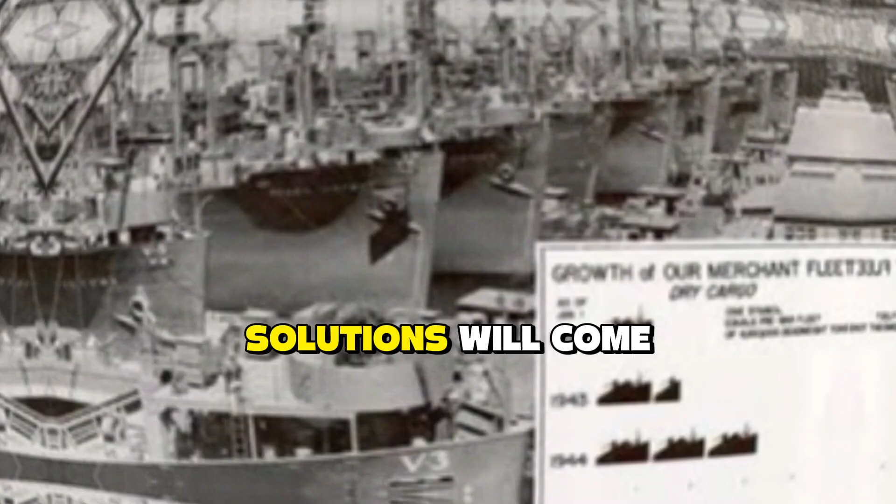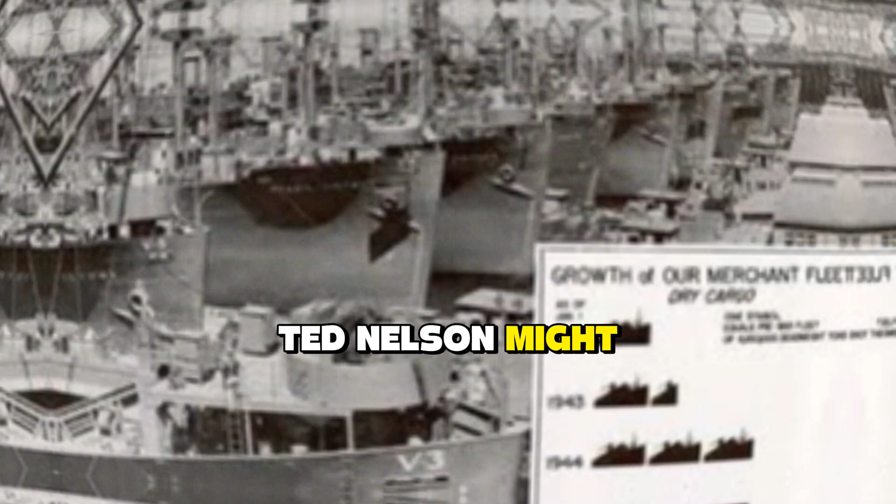As we face the challenges of the 21st century, this lesson remains relevant. The problems we confront, climate change, resource scarcity, infrastructure decay, require innovation at every level. Solutions will come not just from elite universities and corporate laboratories, but from working people who see problems clearly and develop practical fixes. The next Ted Nelson might be designing a better solar panel in a garage workshop.

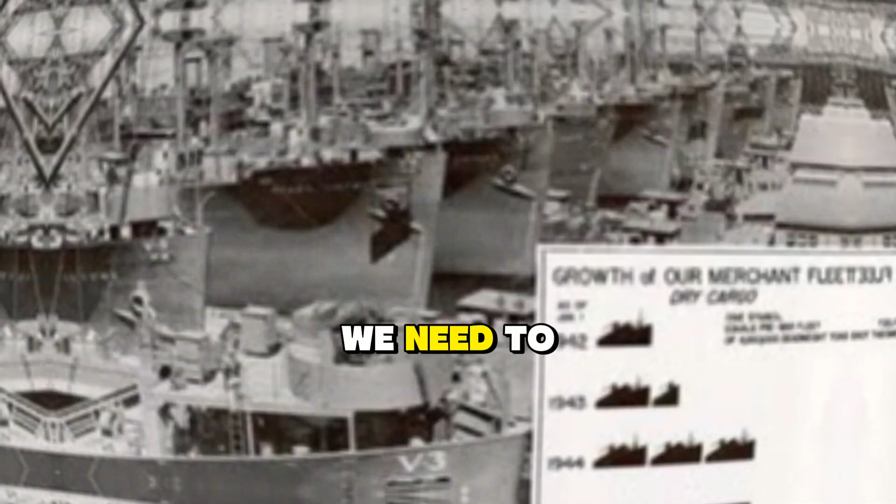The next breakthrough might come from a factory worker who knows exactly what is wasting time and energy. The next revolution in efficiency might originate with someone official channels have already dismissed as unqualified. We need to listen. We need to encourage innovation from all sources.

We need to reduce the barriers between problem identification and solution implementation. We need to remember that some of the most important innovations in history came from people working outside the system because the system refused to listen.

In his later years, when asked about his success, he would shrug and say, 'I just made a better mousetrap. The world beat a path to my door. It was not genius. It was just common sense.'

But common sense applied at the right moment with courage and persistence can change history. That is Ted Nelson's legacy, not the 50 million hours saved, not the E awards, not the global company that still bears his name.

His legacy is the proof that one person with a good idea and the determination to implement it can make a difference. That legacy lives on every time a welder pulls the trigger on a stud welding gun, every time a ship is built faster than the old methods allowed, every time someone looks at an inefficient process and asks, 'There has to be a better way.'

Ted Nelson asked that question in 1941. His answer helped win a war. What questions are you asking today?

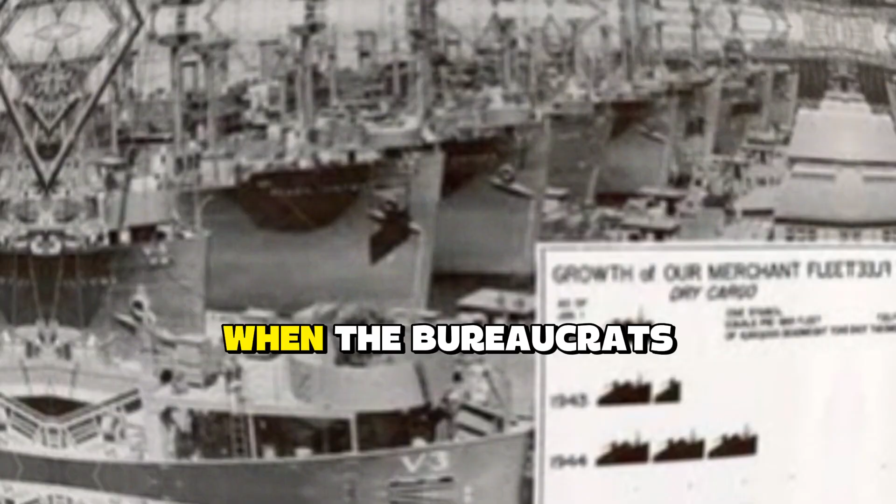And more importantly, when the experts tell you it cannot be done, when the bureaucrats tell you to follow procedures, when the skeptics dismiss your idea, will you have the courage to prove them wrong?

The history of innovation suggests that sometimes the most important thing you can do is ignore the experts. Trust your own observations and build the solution you know will work. Ted Nelson did exactly that.

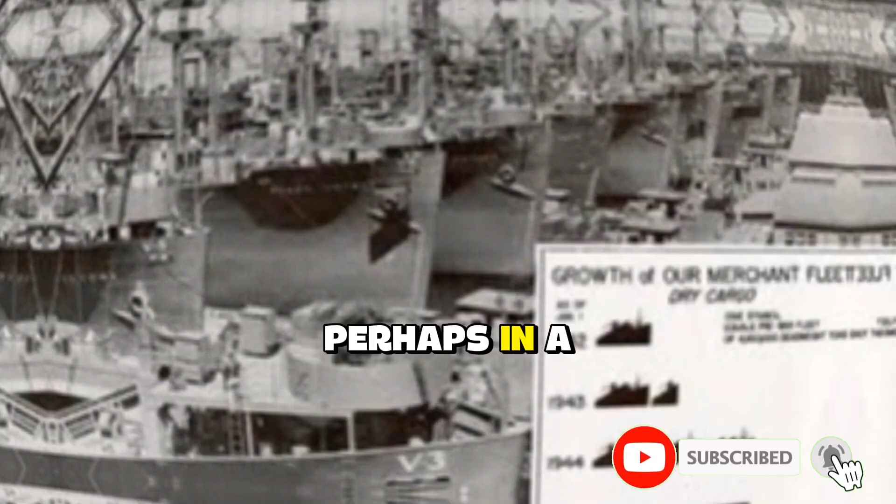80 years later, welders around the world still use his invention every single day. And somewhere, perhaps in a garage or workshop, the next Ted Nelson is sketching an idea that everyone says will not work. But they will be wrong because the best innovations do not come from following procedures. They come from people who see a problem, know how to fix it, and refuse to take no for an answer.